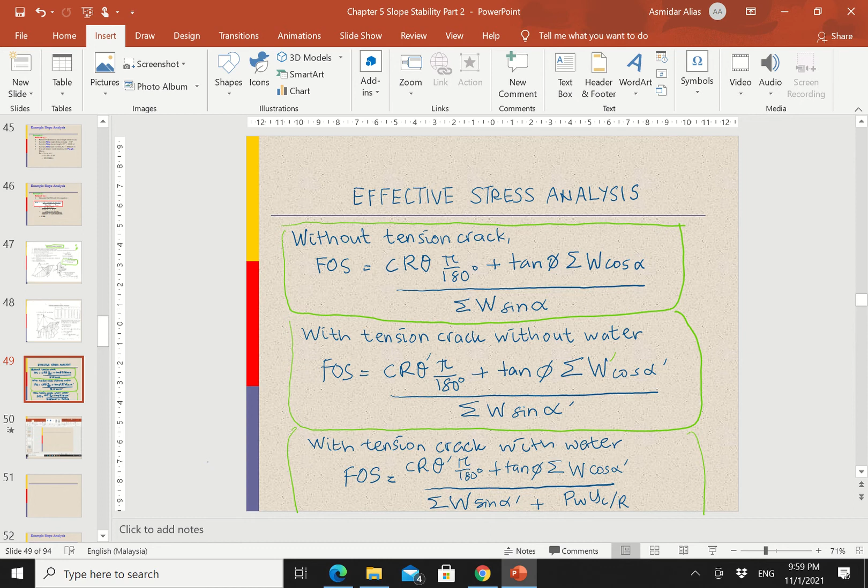Then you have the case for tension crack with water. As mentioned before, tension crack with water requires additional information or equation, that is PW YC over R. You need to remind yourself what PW and YC mean. PW is the equation for force of water, which is half gamma water Z0 squared. YC is the length from the force of water to the centroid of your diagram.

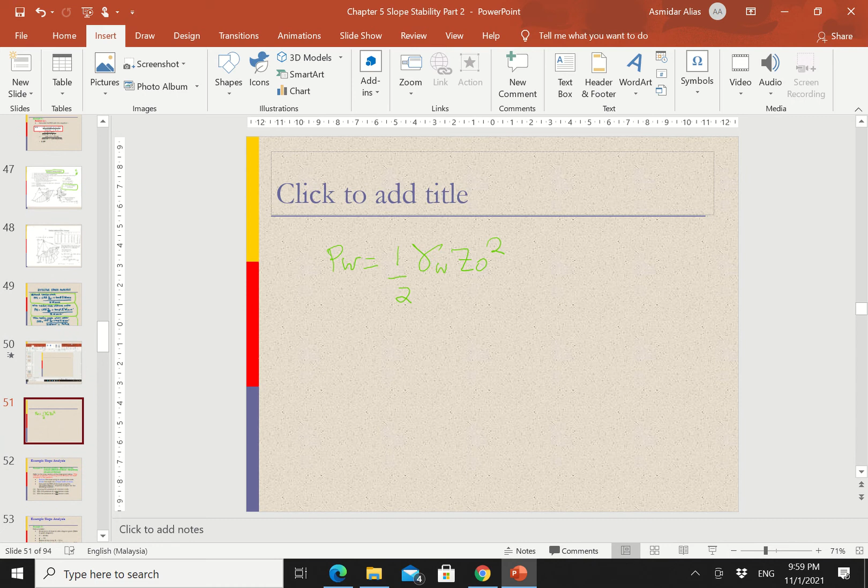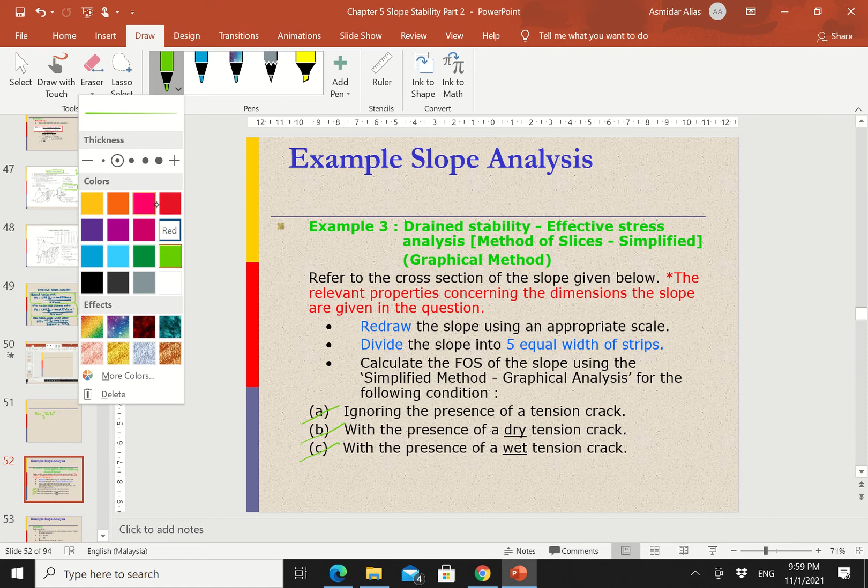Next we need to look at an example for this particular problem. As mentioned before, the possible cases are: ignoring the presence of tension crack, with the presence of dry tension crack, and with the presence of wet tension crack. That is another way to describe tension crack without water, and tension crack with water.

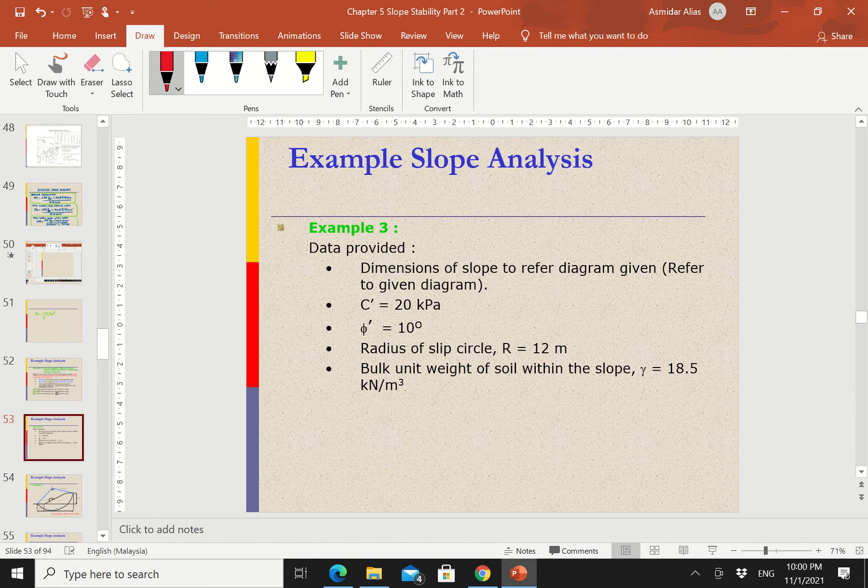The same method applies: the first thing is to gather all the soil parameters, for example the value of C, the value of friction phi, and of course the radius for the circle, whether you calculate it using Pythagoras theorem or measure it from your graph. The ruler itself will give you the measurement of the radius.

And the value for unit weight of the soil. Next is to draw the drawing on your graph paper, according to what has been told in the question, and then transfer it to the graph paper using an appropriate scale.

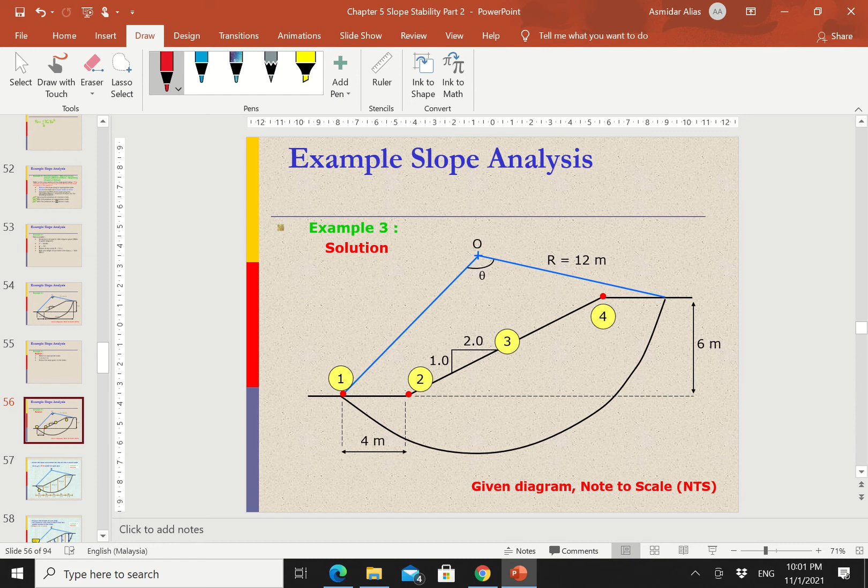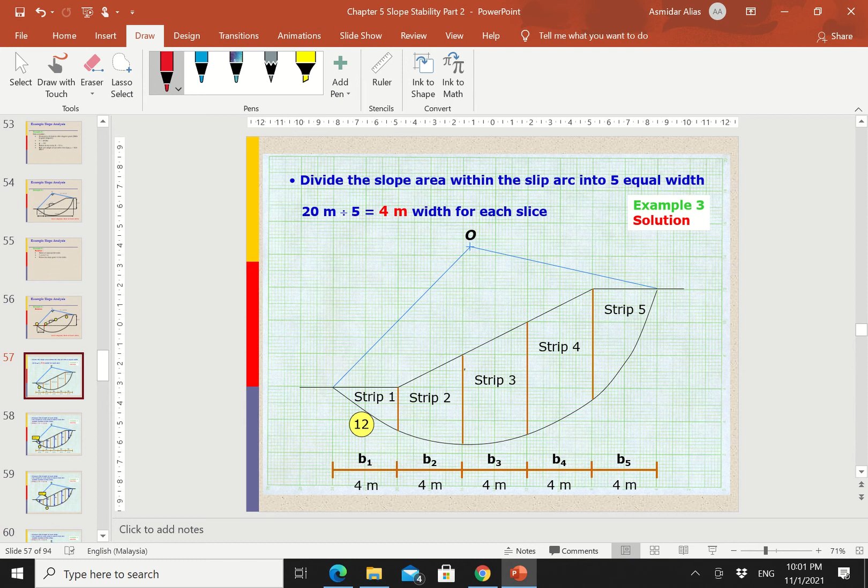You can actually draw it the same way, the drawing process is the same. You need to identify the important points from the measurement in the question, and then transfer them to the graph paper. In this question, you are asked to divide the slope into 5 slices, so this is how you should slice it.

We need to calculate the area and position the H. For a triangle, you position the H, the height of the triangle, at 1/3 of the triangle. For a trapezium, you position it at the center. You need to determine all of these positions first.

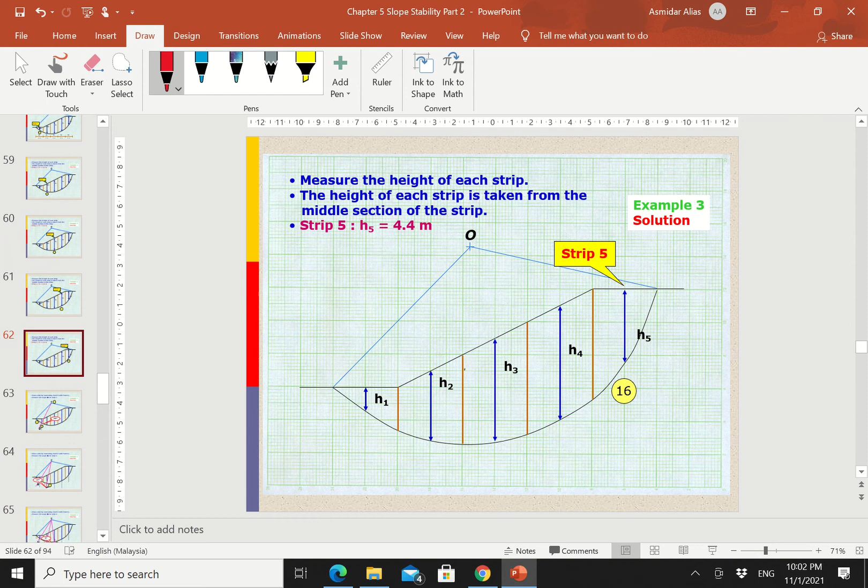So you have strip number 1, strip number 2, strip number 3, strip number 4, and the last one is strip number 5. Why do we need that position? Because we want to calculate the value of alpha.

Before this, you were doing the measurement of the distance d, but for this ordinary method of slices, we need to find the value of alpha. From the position shown for each slice, you draw the pink line from the centroid, make it pass through the line you drew before, and from the center to the pink line, that will be the value of alpha. You need to do this for every position of your slice.

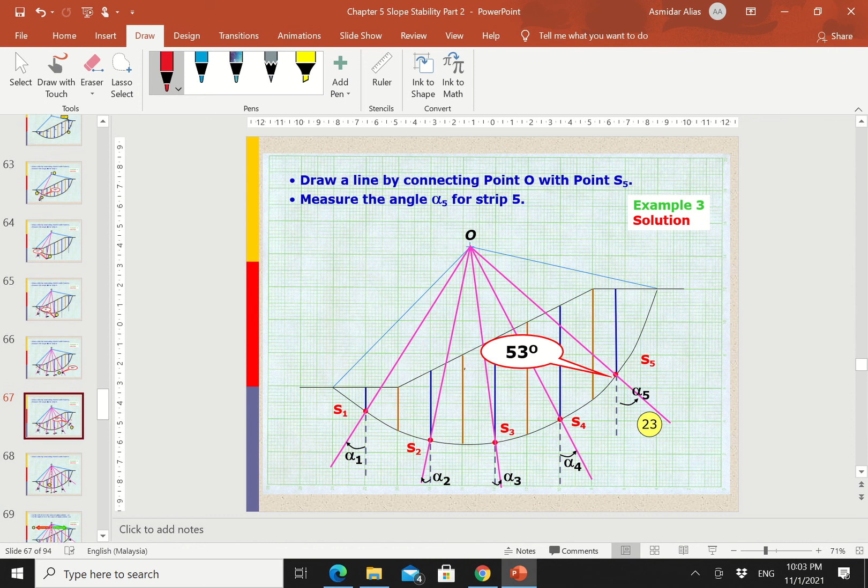So you have alpha 1 to represent the position of slice number 1, alpha 2 for slice number 2, alpha 3 for slice number 3, then alpha 4 and alpha 5. Each alpha is the value of an angle, so you need to use your protractor to find the value of each alpha.

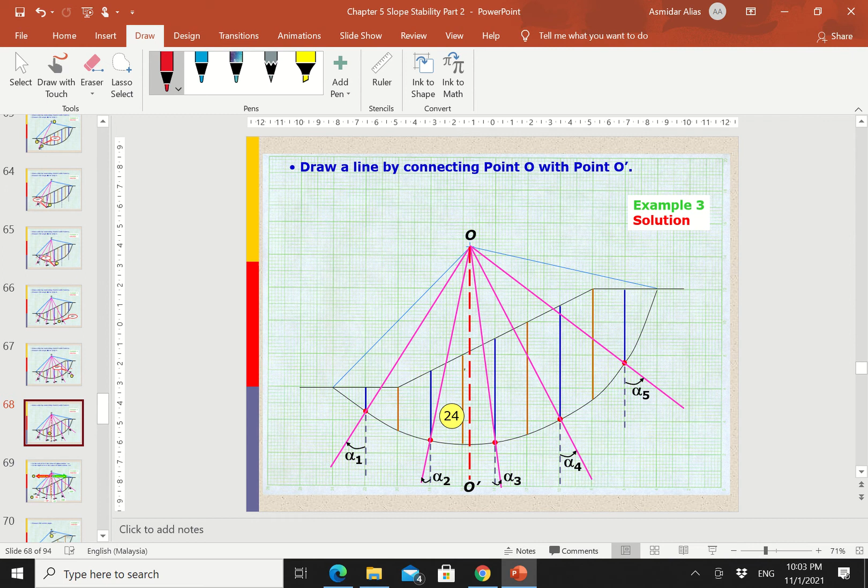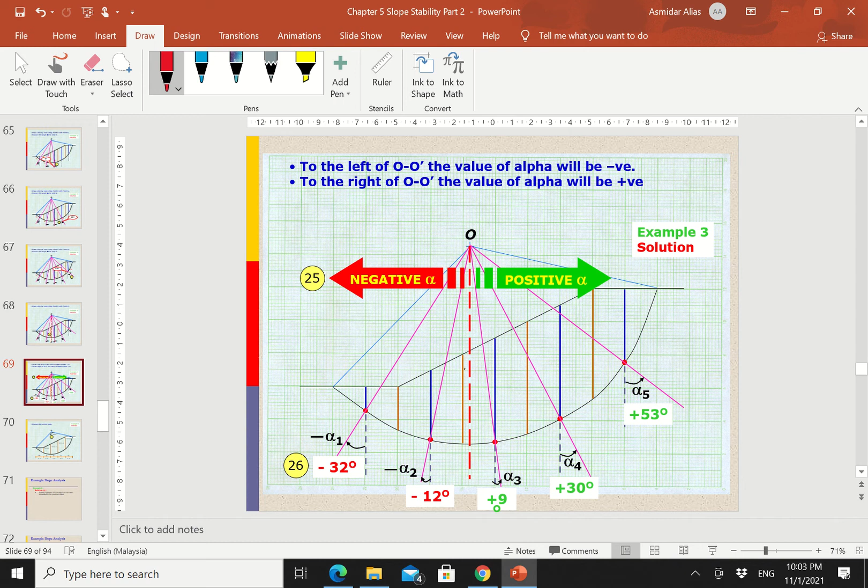Next is to know the value of alpha, positive and negative. Whatever is from the center to the pink line to the left, that is a negative value. So slice number 1 and slice number 2 have negative values, and slice number 3, 4, 5 will be positive values. That is for this example.

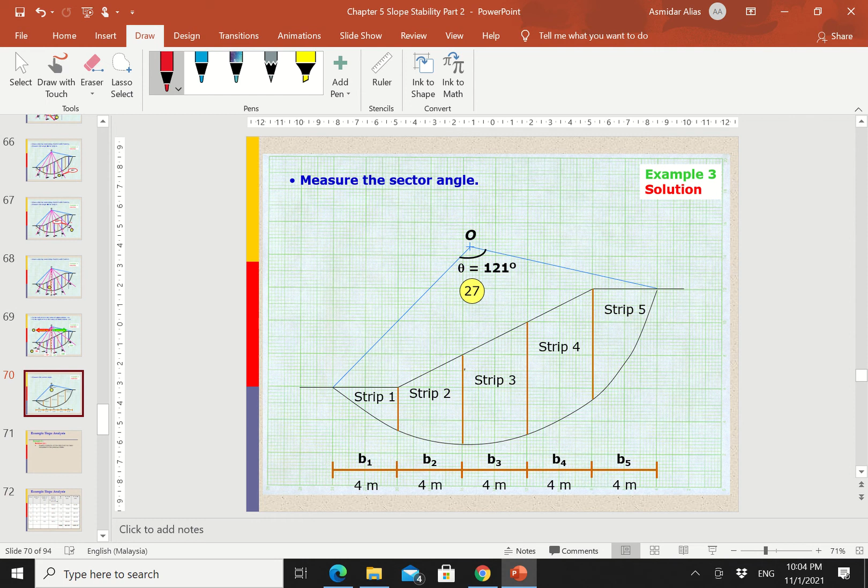Next is to determine the value of theta. You need to use the protractor, and then find the value of theta.

So this information you need to transfer to a table. We always advise you to put all the data in a table, because the table gives you a very neat way to present the data. So this is the thing that you need to include in the tables.

You are referring to strip number 1. You need the width for the strip, you have the height of the strip. Calculate the area, depending on the shape of the strip or slice, and then you get the value of the area, and then transfer the value of alpha. Next is to calculate W sin alpha and also W cos alpha.

So at the end of the process, up to slice number 5, you must total up the value of W sin alpha and then total the value of W cos alpha. And the last part is to put every piece of information that you have from the question and the graph paper and calculate in the equation here.

So C times length of arc, plus W cos alpha multiplied by tangent phi, divided by W sin alpha. So C is the cohesion value. Length of arc is R, which is your radius, multiplied by theta, which is the angle, and those values must be calculated in radians, then you put all the information in the equation.

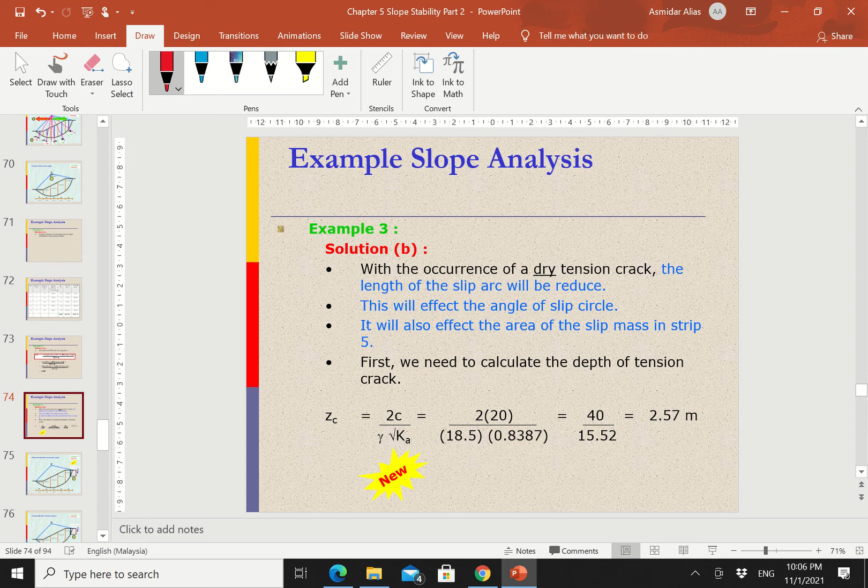Put in the information and then you get the value for tension crack, which in this example is 2.57 meters. Position that on the graph paper.

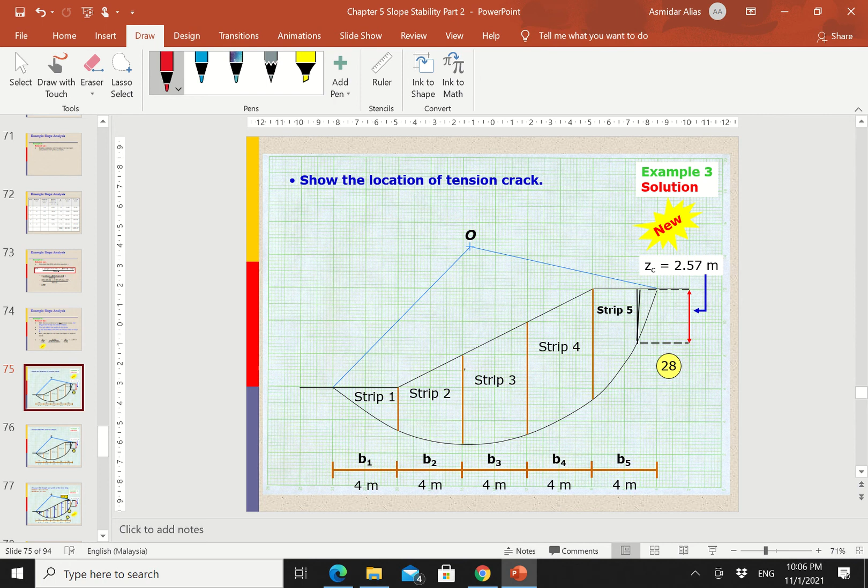Now we can see that strip number 5 will be modified into a new shape, and we use that measurement of Zc to determine the new shape for slice number 5 or strip number 5.

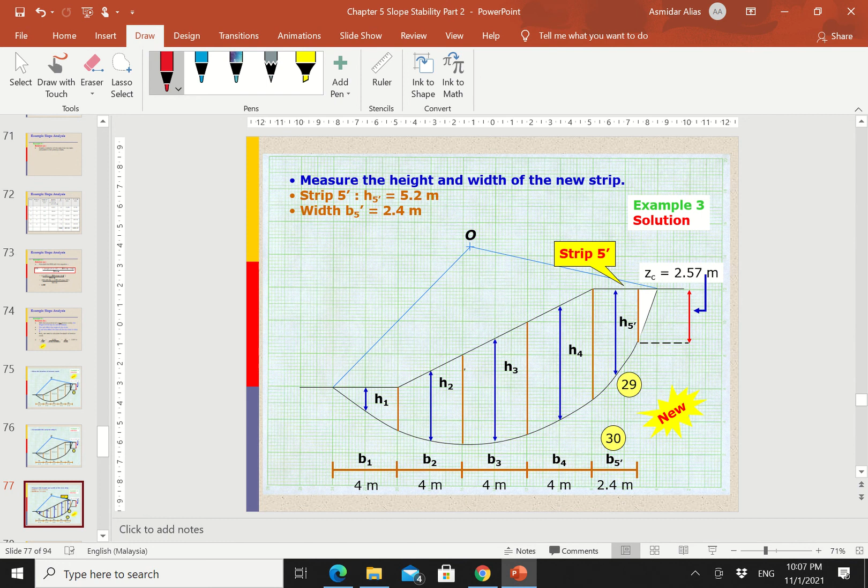So next is to calculate the area for slice number 5, and of course to position it. The blue line here marks the position, because right now slice number 5 has changed from a triangle to a trapezium, so we need to position it at the center of the trapezium.

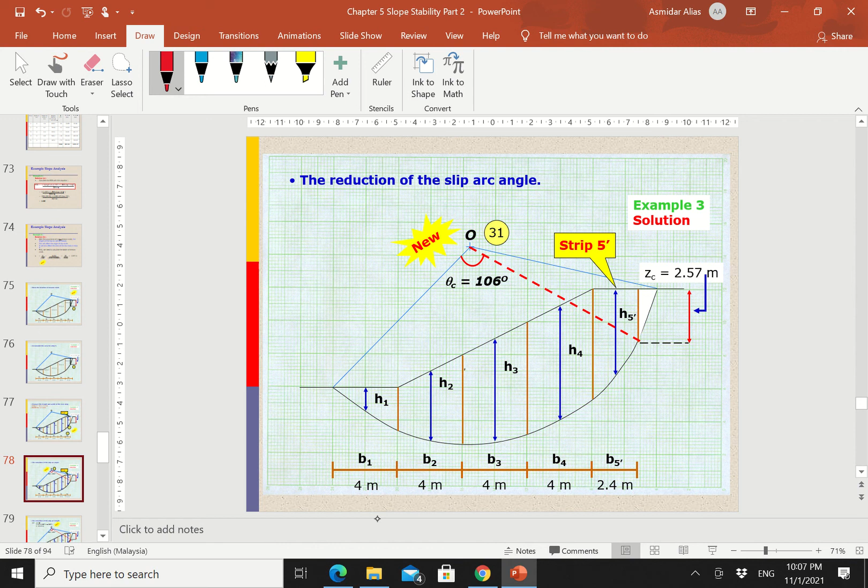So next, what you need to do is draw the red line from the centroid to the length of the tension crack depth, and we will get a new value for theta, which is theta c equal to 106 in this example.

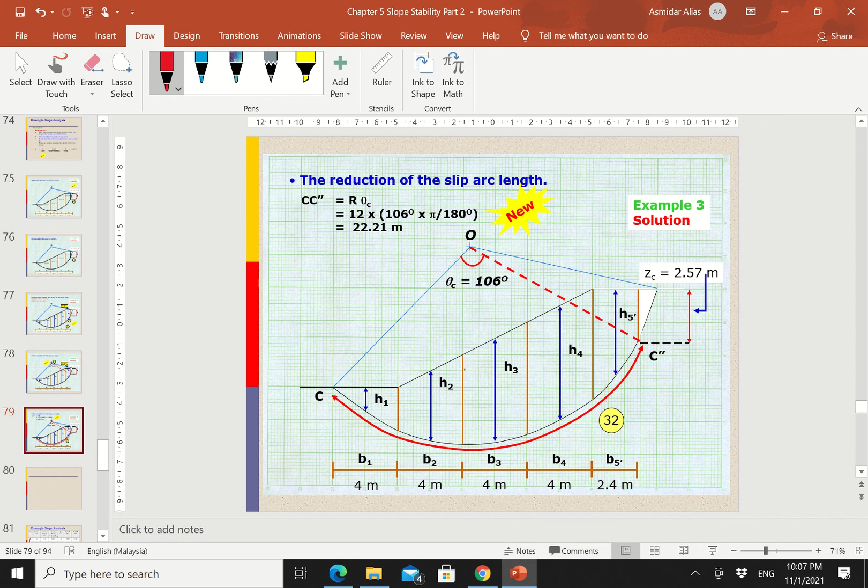So next we need to determine the new length of the slip arc, and of course we need to modify the value for the length of the slope. So in that case, we also need to do the modification for slice number 5.

The alpha should be different because right now the position of slice number 5 is at the center of the trapezium. So use the same method from the centroid, having that pink line, and then crossing that blue line, you get the angle of alpha 5.

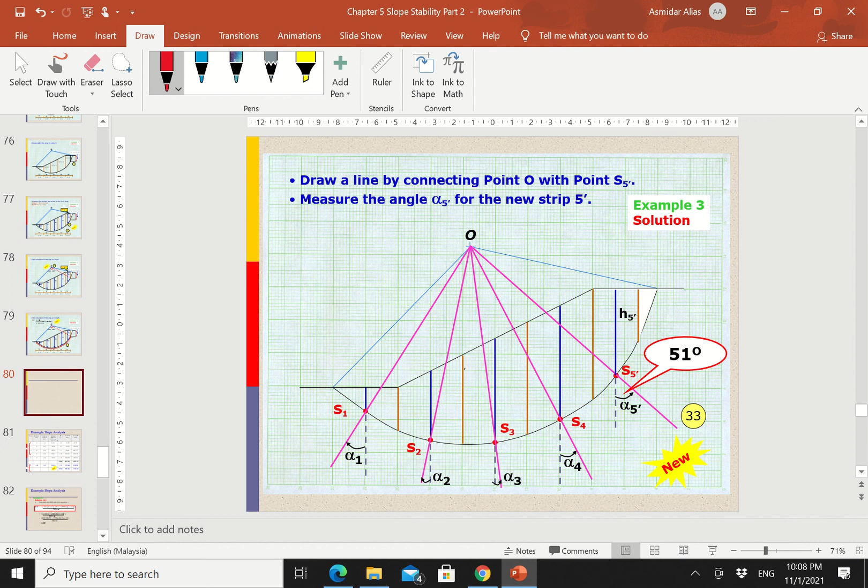So now we need to put this in the table, so that the modification right now is for slice number 5, and then you get the new value for alpha, the new value for W sin alpha, and the new value for W cos alpha for slice number 5.

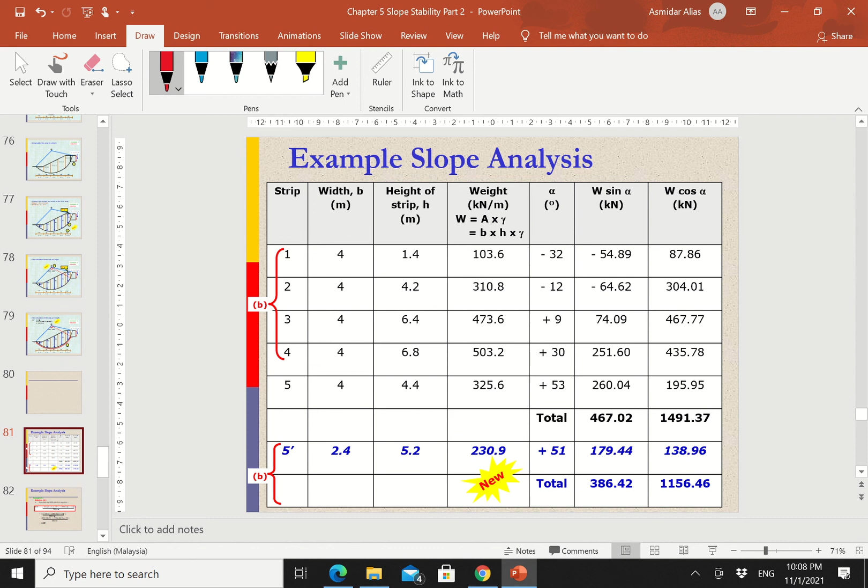So right now, to solve for tension crack without water, take the value of strip number 1, 2, 3, 4, and then plus the new value for number 5. So next, use this information, put it inside the equation, and then you get the new value for F of S.

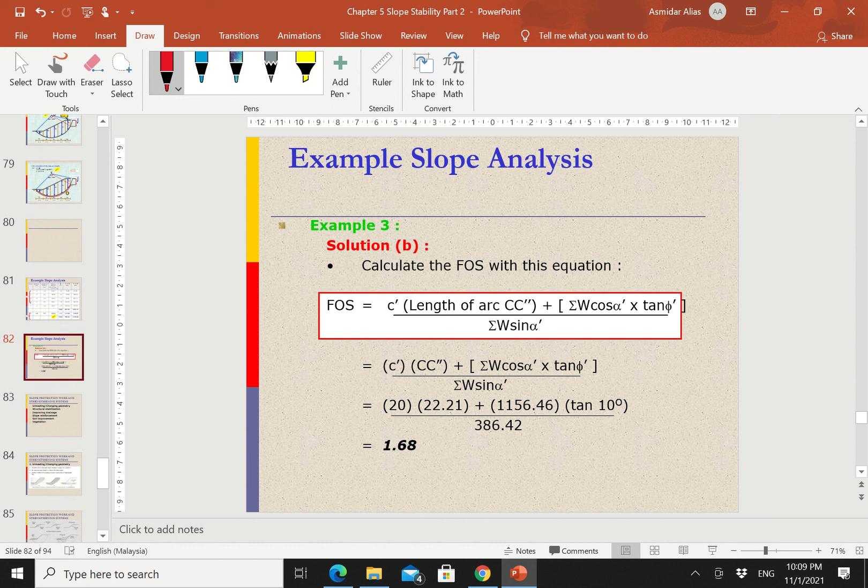So of course, sometimes they might ask you the question for tension crack with water. Use the equation given, because the modification we have already done, but right now you need to put another equation for the modification with tension crack with water.

Okay, the last part for this discussion will be slope protection works and strengthening systems. This is to ensure that our slope is stabilized after you have done your construction or design, and we need to do some modification if there are uncertainties in your construction. So these are the things that can be done for slope protection work and strengthening systems.

The first one is unloading and changing geometry.

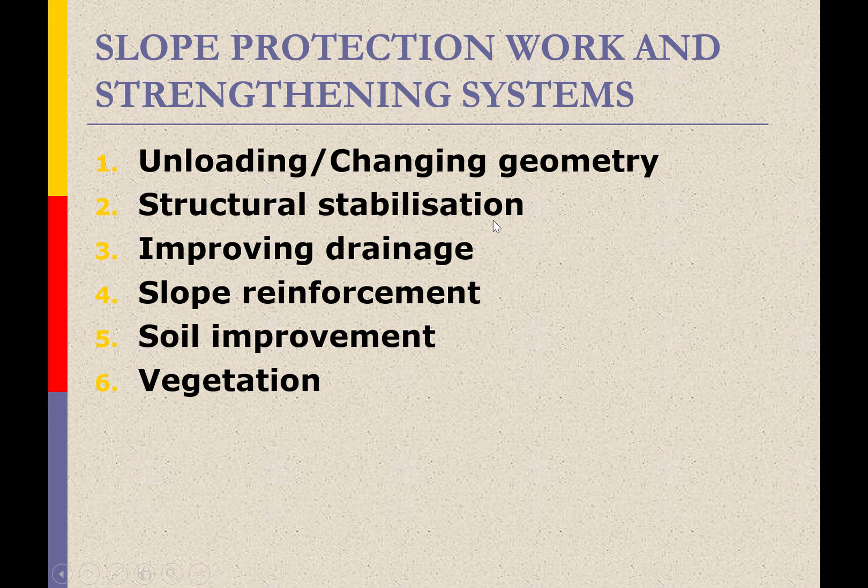So instead of having a very steep slope, you might want to change the angle of the slope so that it's not so steep in terms of the slope angle. Then we can use structural stabilization, improving drainage, slope reinforcement, soil improvement, and vegetation. You can explain how we want to use unloading and changing geometry.

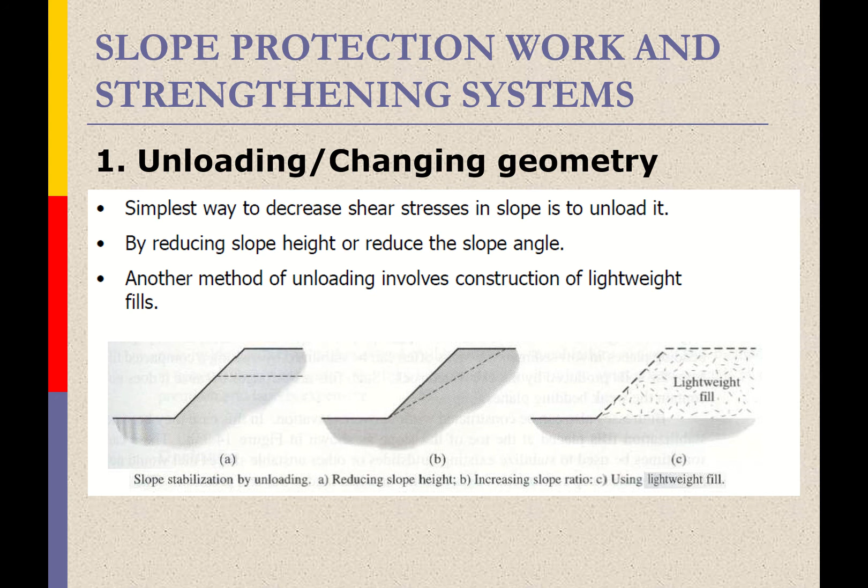So the first one is slope stabilization. By unloading, you cut some portion at the top of the slope. For A, reducing slope height, you can flatten the slope, reducing the slope height. For B, increase slope ratio, and C, using lightweight fill.

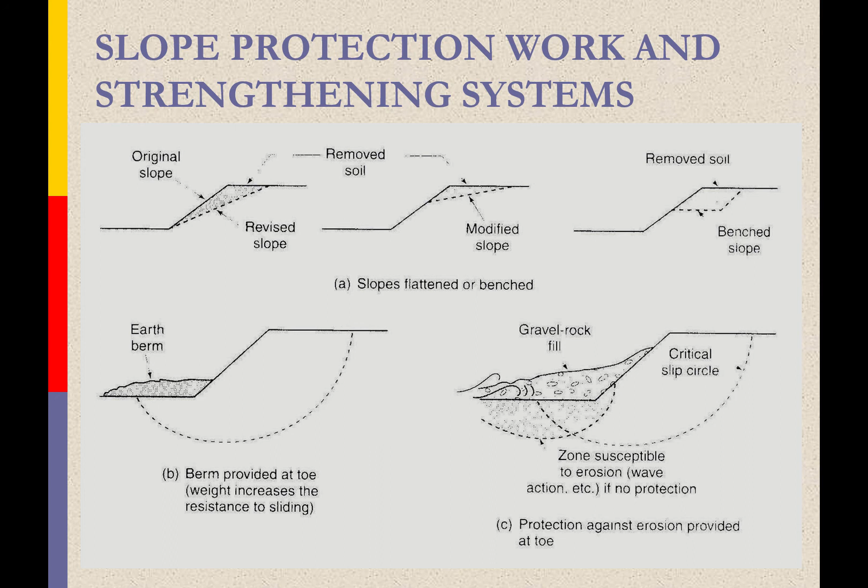So a lot more things that you can do. You can refer to this figure to give some information for changing geometry and unloading some of the load on the top of your slope.

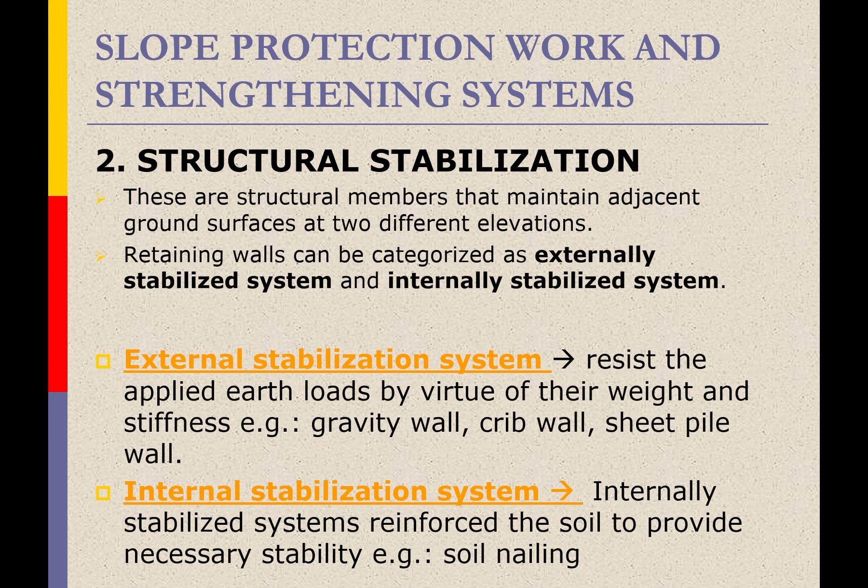For structural stabilization, you can use an external stabilization system, for example, resisting the applied earth load by virtue of their weight and stiffness - gravity wall, crib wall, and sheet pile wall. Then internal stabilization system - internally stabilized systems reinforce the soil to provide necessary stability, for example, soil nailing. So these are the examples.

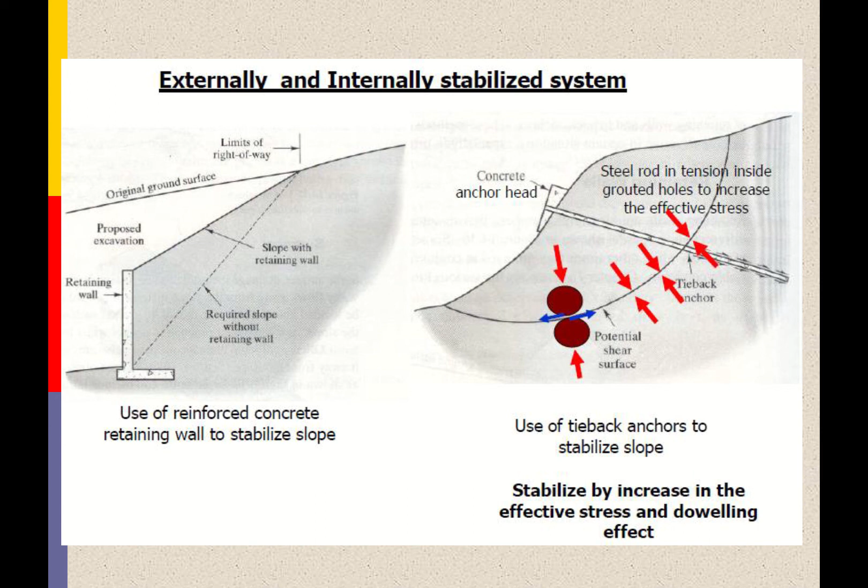You can see that we design for the slope. In front of the slope, you have the retaining wall, and some use the anchor system. So it's kind of like you nail the soil, using a tie rod or a steel rod, and then you put it inside the slope, nailing that steel rod inside the slope area.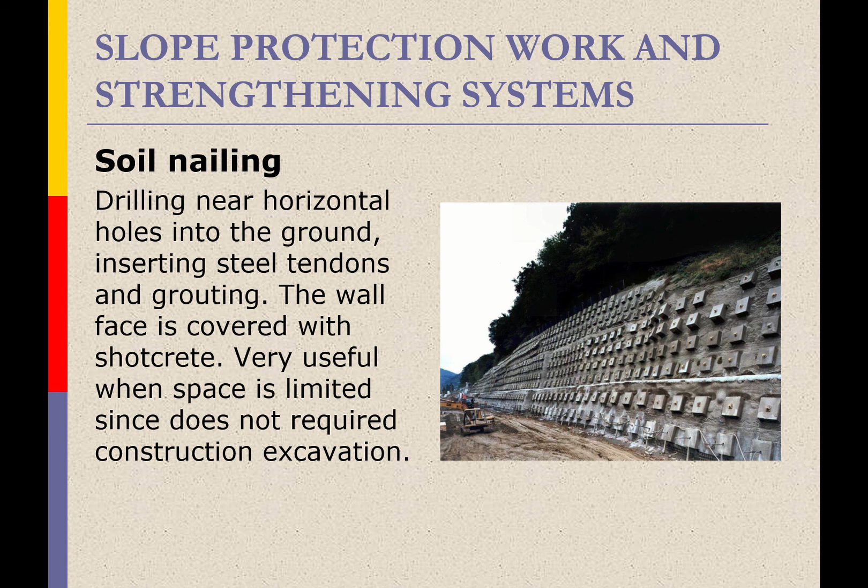So this is the surface of soil nailing. The face of the slope right now is the soil nailing system. You can see that a lot of rods have been installed inside the slope, and this is quite a steep slope, so this kind of strengthening system is very much needed.

Next, what you can do is improve drainage. Of course, this is a must for the slope, especially if you install a retaining wall in front of the slope. So we need to ensure that the slope is properly drained if water exists behind the slope or in the backfill of the retaining wall.

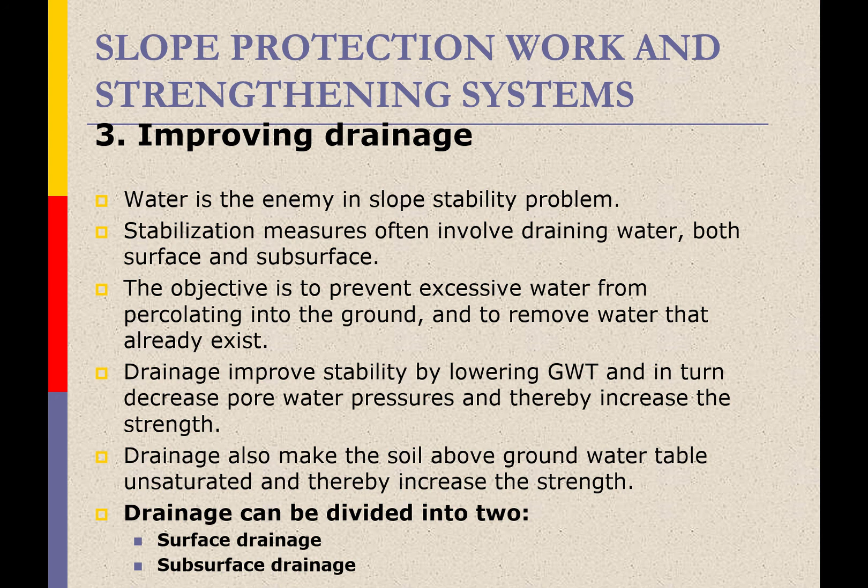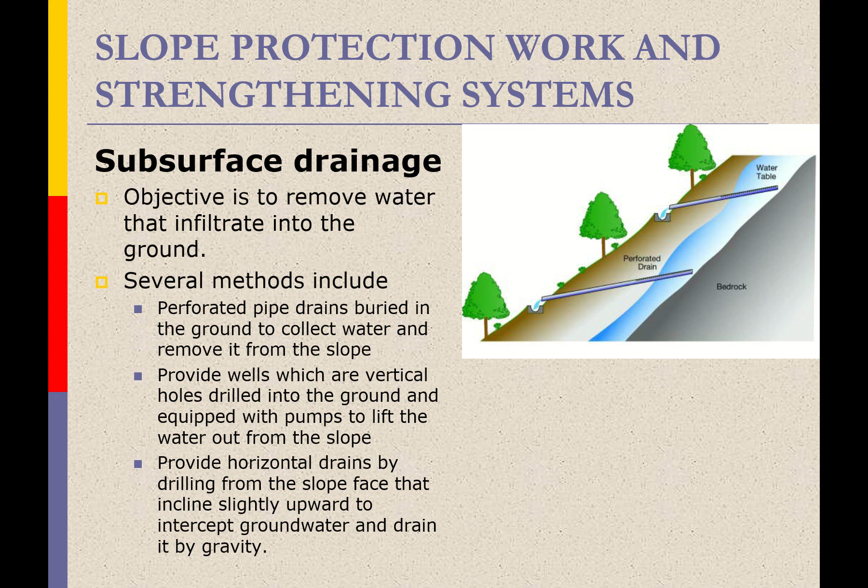What you can do is provide surface drainage, and of course you can also provide subsurface drainage. This is how you install the subsurface drainage. We call it perforated drain, and then you have surface drainage to drain all the water out.

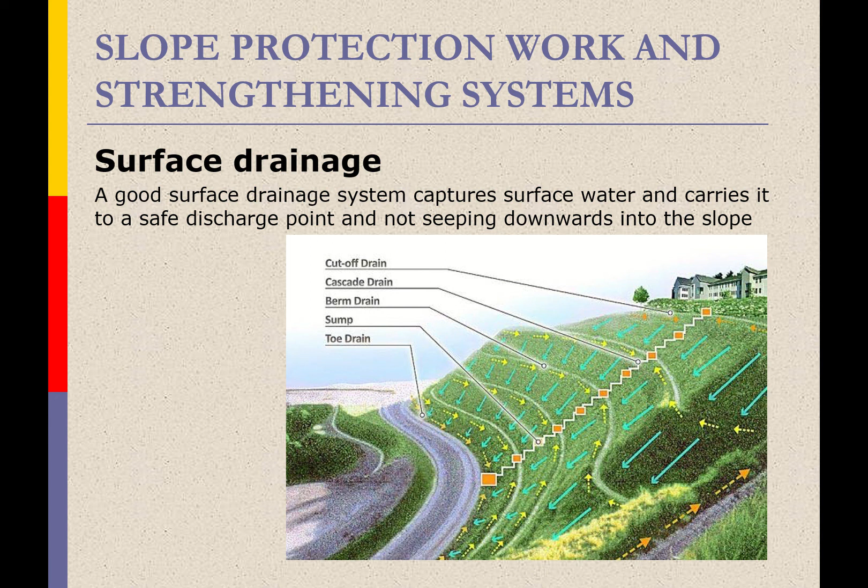This is the system for surface drainage. It is in the horizontal direction of your slope, and all the surface water must follow the flow - we must provide surface drainage so that the surface water can drain from the slope system. So a good surface drainage system captures surface water and carries it to a safe discharge point, not seeping downwards into the slope. This is what we want from the design of the slope when we provide surface drainage.

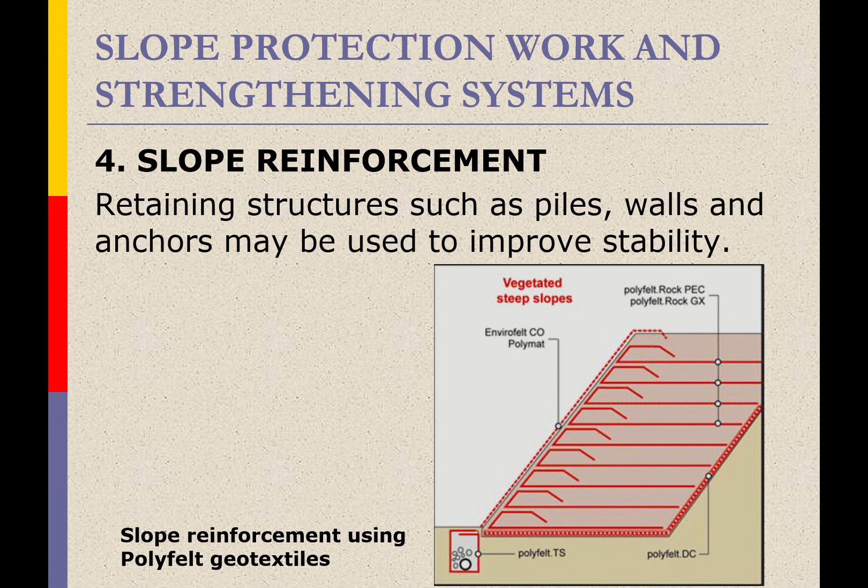For slope reinforcement, other than retaining wall and nailing that we already discussed earlier, you can provide slope reinforcement. Retaining structures such as pile, wall, and anchor may be used to improve stability. And of course, we use geotextile to reinforce the slope system. This drawing shows that slope reinforced using polyfelt geotextile - we are installing the geotextile by layers, so it will enhance the stability of the slope.

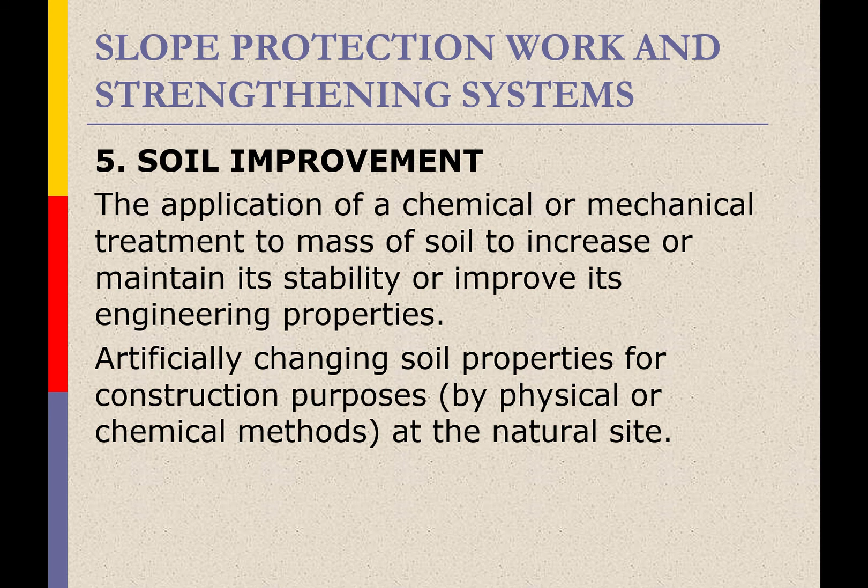Other soil improvement is the application of chemical or mechanical treatment, for example, installing or putting Gunite spray on the surface of the slope. And of course, a lot more methods can be used on site. This is more likely an eco-friendly way of protecting your slope.

So we are installing vegetation, and of course we will select suitable plants or grass to be installed on the surface of the slope. We need to ensure that the grass has a vertical root system which can grow to the slip surface area of the slope, and if you can provide grass which helps with maintenance, that's easier. So the information is here.

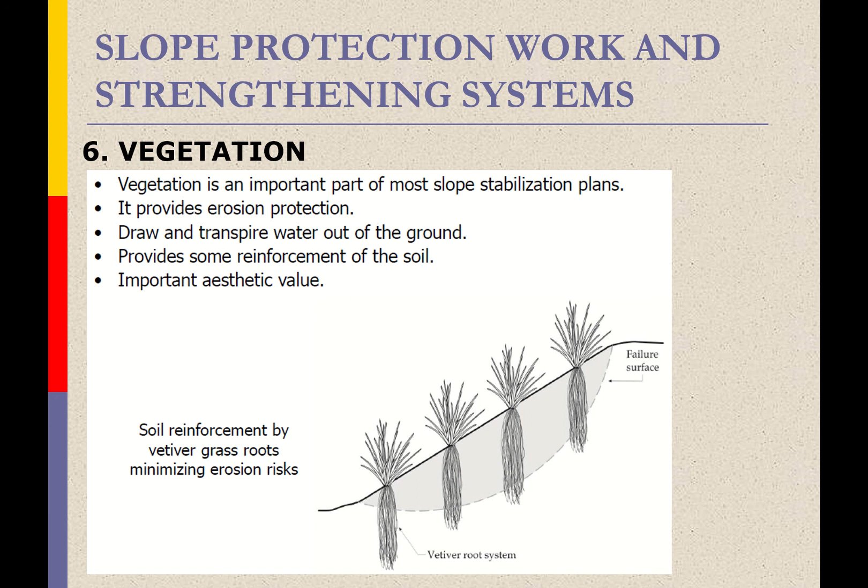Vegetation is an important part of most slope stabilization plans. It provides erosion protection, draws and transpires water out of the ground, provides some reinforcement of the soil, and most importantly has aesthetic value. So that is all in terms of the discussion needed.